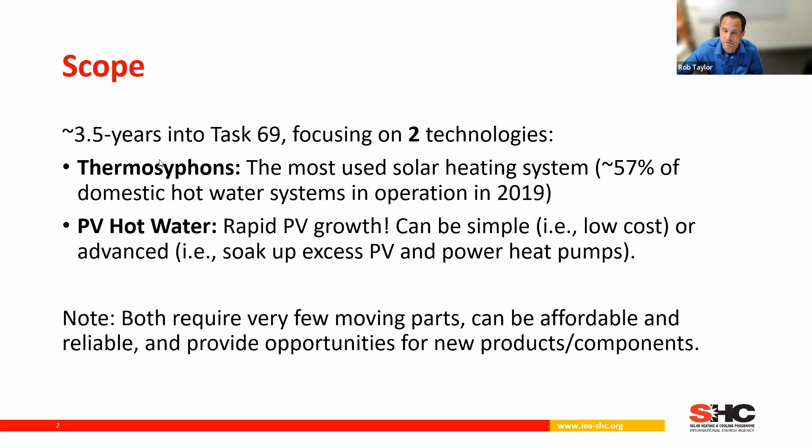So you think of thermosiphons as an old technology that have been around for a long time, but there's ways to make it smarter, ways to make it more durable and reliable. And so there's quite a bit of innovation going on from companies out there.

There was also an IEA report, it's a few years old now, but it said that we need to get to 400 million solar hot water systems worldwide by 2030 if we want to reduce emissions and reach these targets. Many countries around the world have climate or renewable energy targets now. Not every country is achieving those targets, but solar hot water is something you shouldn't forget about as a way to get towards those targets, because it's a big energy demand and there's a lot of interesting things we can do with solar hot water systems to help meet those targets.

But it doesn't look the same everywhere. Different countries, different climates, different income levels, different skill sets in the economy, and different regulations might dictate different technologies are the winners.

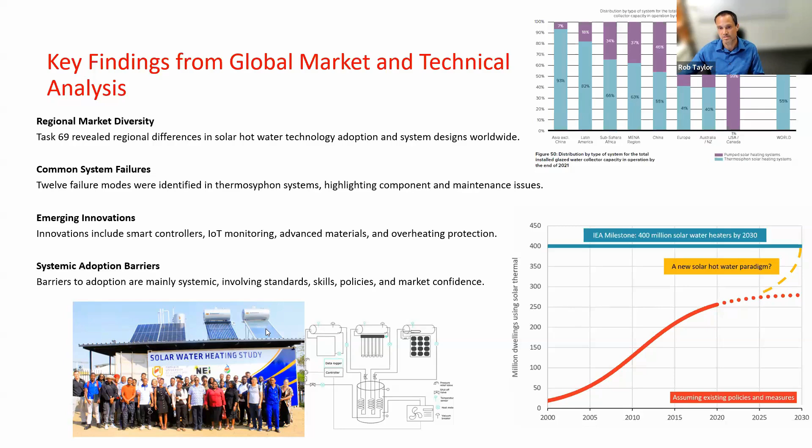There's a comparative study where they have side-by-side PV hot water heating and a couple different thermal technologies there side by side. So we were looking at those comparisons. We did some surveys in our task, and we found what manufacturers are looking at and looking at developing.

A lot of manufacturers are looking at things that maybe seem like they've been well developed, but they still need innovation. So mounting systems - like in the case of Asia, mounting these technologies on the balconies of buildings, even PV hot water heating technologies out on the balcony, and making that safe.

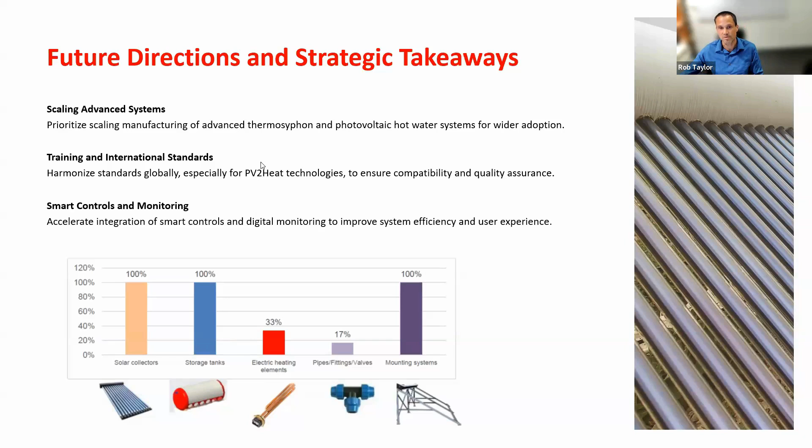Just ways to incorporate solar collectors in the building facade is an interesting one. And of course, like I said, the smart systems and monitoring systems.

There's some materials innovations using plastics to lower costs, trying to find materials like aluminum and new working fluids, which won't suffer from corrosion or maybe could go to higher temperature in places like Africa without having issues. And of course, these little apps and monitoring systems, because previously some of this hot water technology had no idea how much solar energy you were generating into your system.

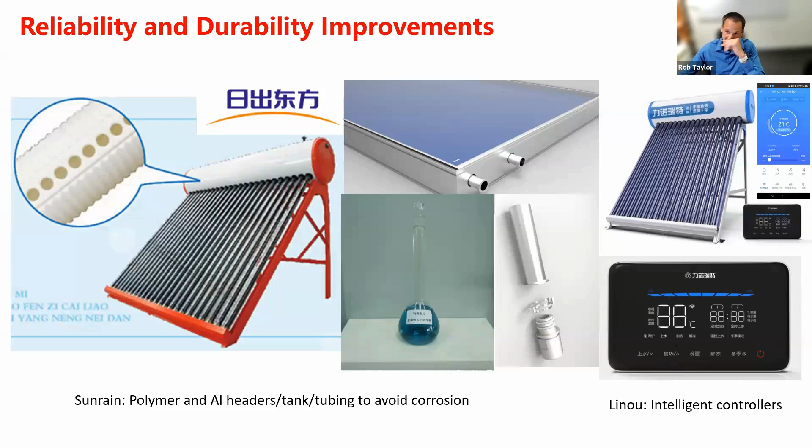And actually, most of the journal papers ended up being around PV hot water heater systems and how to get the most out of those, basically. And so there's a lot of interesting academic stuff in there.

A lot of it came from my colleague here at UNSW, Baran, and some people in Australia for some of those journal papers. And anyway, it's very interesting to me because it's quite cross-cutting across different operating environments and different markets.

So in Australia, for example, one challenge in our market is that a lot of the PV systems are being curtailed. Last year we had something like 10 gigawatt hours of PV electricity got curtailed, which turns out to be the exact same 10 gigawatt hours that we need for hot water heating. So it's just a matter of trying to match up that thing in this operating environment.

I think Australia is kind of living in the future for how much residential PV we have relative to the rest of the world. And also in places like these pictures here in Africa, the solar thermal systems are still going to be dominant for a while because that's a pretty robust technology that can go in those locations, but they do need a few innovations and some ways to make those more reliable.

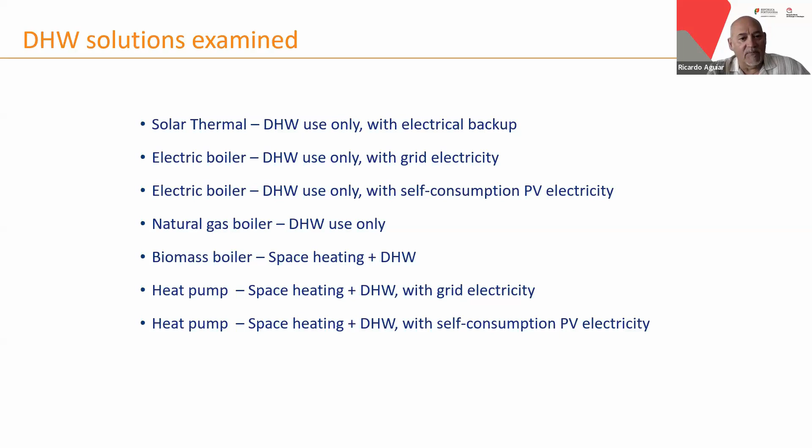These were the solutions examined: solar thermal with electrical backup, not with gas backup. We immediately detected that with a gas backup, the comparison was not good for solar thermal, so we have only used electrical backup. So: electric boiler with a direct link to grid electricity, with also PV; and natural gas boiler; biomass boiler; and heat pumps, two versions, one fed with the grid electricity and another also with self-consumption of PV. There are no solutions with storage because, of course, in this case we already have a tank of hot water which is the storage, so we don't examine things with batteries. We already have the storage.

I will not bother you too much with the methodology and the assumptions of the work. Just to say that we have followed the guidelines for the cost optimal calculations issued by the European Commission, and this includes evaluating the performance of the systems for around 30 years, which is more than the lifetime of most systems, so we have this replacement of parts of the whole system sometimes. Maintenance, etc., is all included.

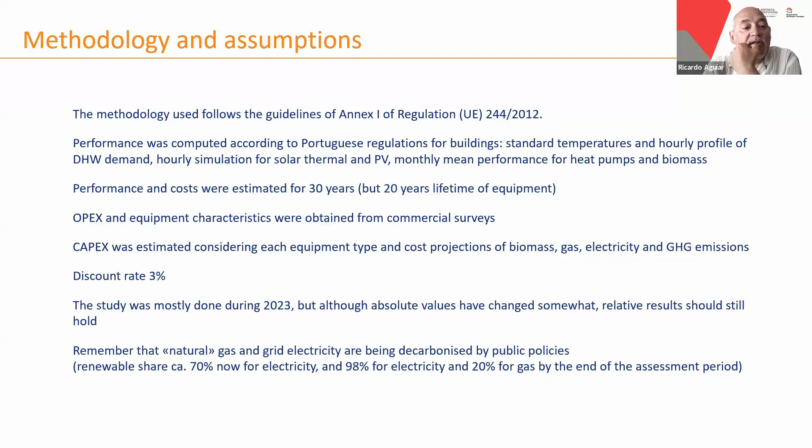Also, in the case of our country, there is a large effort for decarbonizing the grid electricity, so it kind of contains a lot of implicit renewable energy. It's not yet comparable with PV mounted on the building, but we'll get to that in some decades. By 2045 or so, it will converge with almost 100% renewable in the grid. So it must be seen as an indirect way of using PV, but in the grid electricity instead of in the building. And also decarbonization of gas-based solutions, with biomethane and hydrogen, but that only goes to 20% decarbonization. This was also taken into account, so I think we did not leave anything obvious outside of the work.

So this is, let's say, the main results regarding costs. We obtained this result: the lowest costs are for solar PV and biomass. When I say solar PV, you must think of PV directly connected to the electrical boiler - that's what I mean by solar PV. Solar thermal is not too far. And there are much larger costs for heat pumps, but as I will remark at the end, these heat pumps are multi-use, so they do space heating as well as domestic hot water, which is why the costs are so wide. The electric boiler costs are high because the cost of grid electricity is much higher than the cost of solar PV installed on the building.

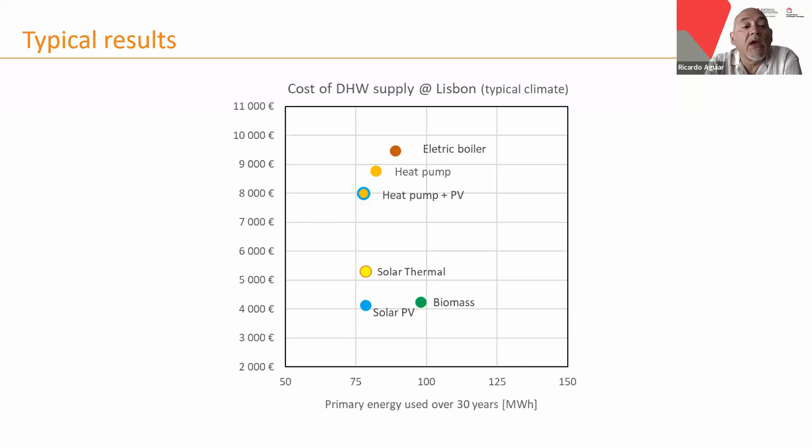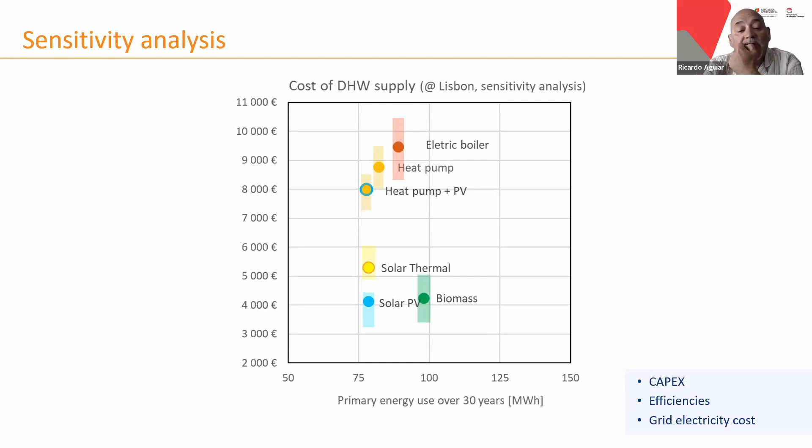So we've done some sensitivity analysis on these results, and they fall within these bands, even when we change the price of the systems, efficiencies, cost of electricity, etc. So the ranking is pretty solid - it doesn't change very much with these assumptions on costs in particular.

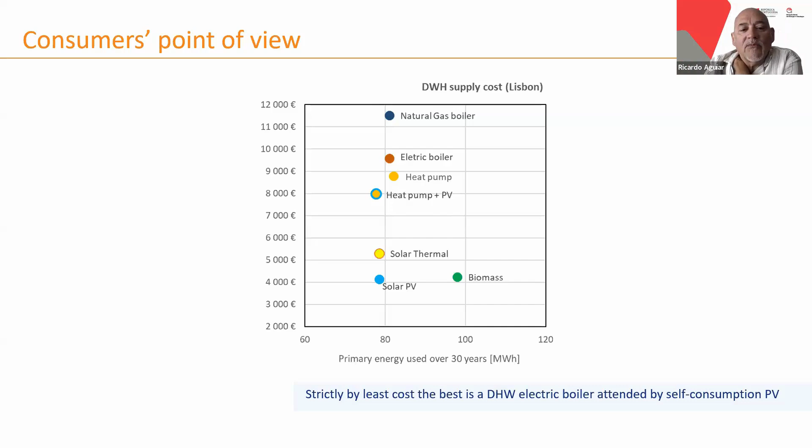On the high end of the scale. So, but again, this is the basic result regarding costs. Now, there are other points of view, and I work in a director general connected to the Ministry of Energy and Environment.

So my point of view is sometimes different from this cost-only point of view. And we have the point of view of the building regulations. For that, it's important the local share of renewables. In that case, you get solar PV at the top at 100%, then biomass and solar thermal.

This 80% solar thermal could go up to 100% if you use solar PV also as a backup to the solar thermal system. But both solars produce energy at the same time. So in principle, these backups are for cloudy days and nights, when neither solar PV nor solar thermal is available. That's why this option of solar thermal is not at 100% like solar PV.

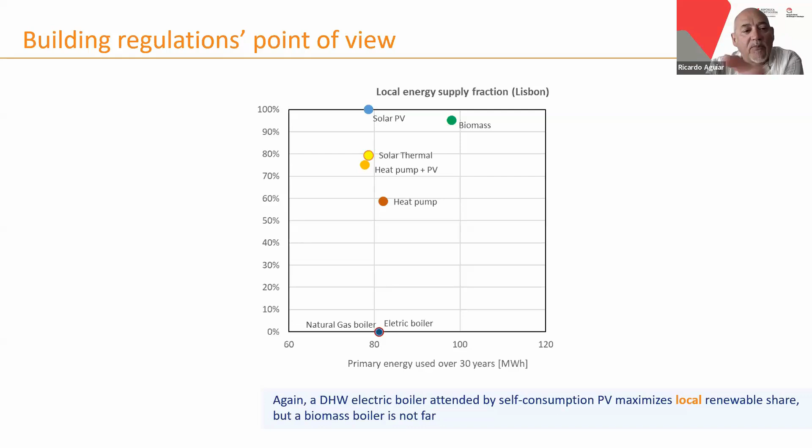So this is the local share of renewable energy, and that's important for classifying the buildings. Then there is the National Energy Policy's point of view, for which you want to maximize the renewable energy used by the building in the general context.

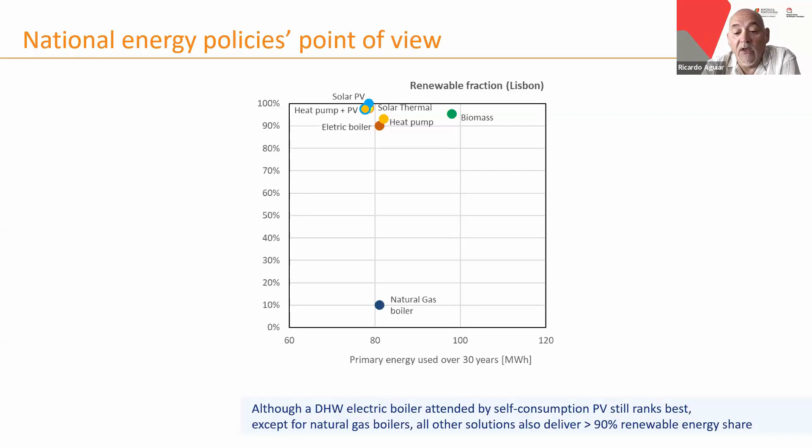From that point of view, all the systems except the natural gas case are above 90%. Even the electric boiler fed by electricity off the grid, in our special case in Portugal, assessed over 30 years, not right now, but over these 30 years, would be close to 90%. So all these solutions would be desirable from the point of view of the broader context of national energy policies. So, other criteria.

Of course, all this can change if we think about other things. If you have just an electric boiler, you don't have other equipment. You can save space indoor and you don't have things outside the building, etc.

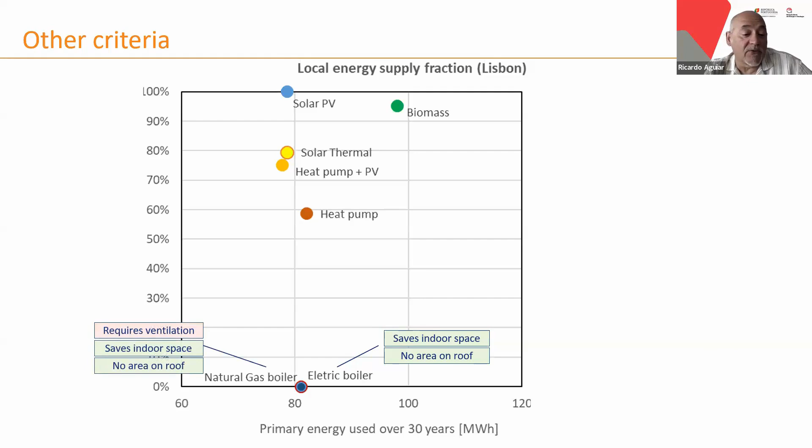If you have a natural gas boiler, you must have ventilation and requirements for air quality, etc. If you have biomass, you have the problems of storage space. You don't have to use area on the rooftop, but you have air quality issues, especially if you use biomass inside a dense urban area.

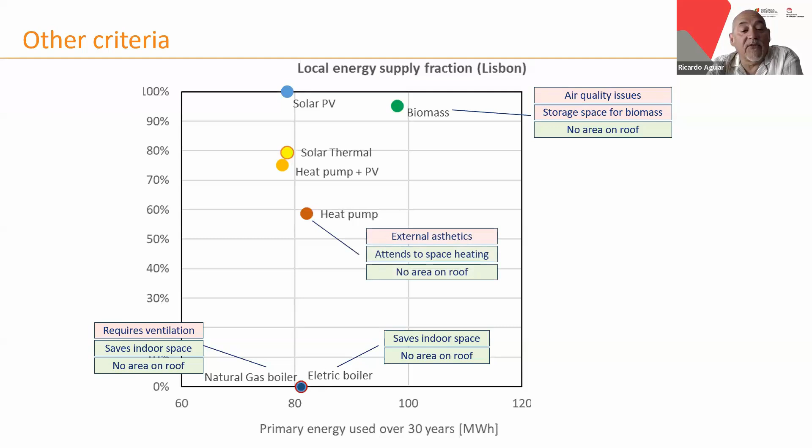It's not desirable. Heat pumps have the advantage of attending to space heating also, but you have an external device. The heat pump itself is outside the building, and that's an aesthetical problem. Besides the price, I'm not talking prices right now.

With the heat pump plus PV you still have the problems of external devices, but it's best in terms of primary energy. And as the heat pump has a COP of 2 or 3, as Rob mentioned, you also do not need to use a large area on the roof, which is the advantage of solar thermal, a big advantage over solar PV, since it requires smaller areas because it has more efficiency.

But as a problem, in contrast with solar PV, the collectors must be tilted, and this is a problem of aesthetics. But it has a large advantage that is not usually mentioned: in the context of reshoring the industry that has gone to China, and also to other countries like India, Indonesia, etc., it's easier because it requires only glass, steel, some insulation, aluminum—things that are more available and easier to handle for the European industry, which is, I'm sorry to say, my concern, than in the case of solar PV, which is dominated by Chinese products.

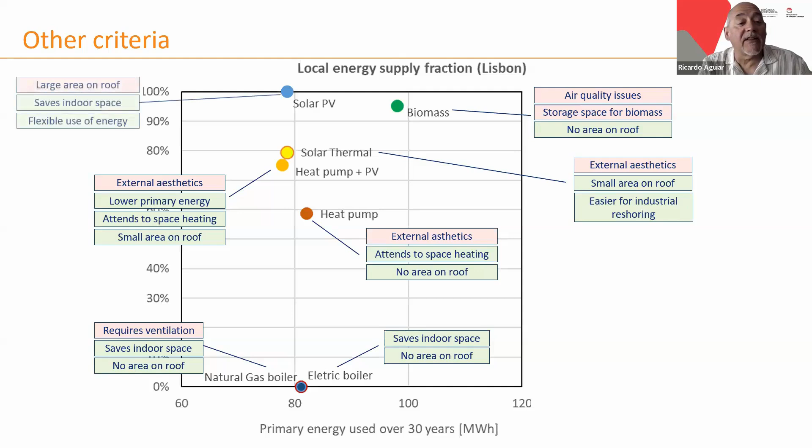And finally, regarding solar PV, we have this problem of larger roof area, but we have also this advantage of flexible use of energy, less plumbing needed, etc. So you have a number of advantages in PV. But all the solutions have some kind of problem, and it will depend on the actual context where we apply the technology to find the best thing.

So, just to finish, if I am in Portugal and have a new building with apartments, say 6 stories or 4 stories of apartments, you don't have much room on top to install PV.

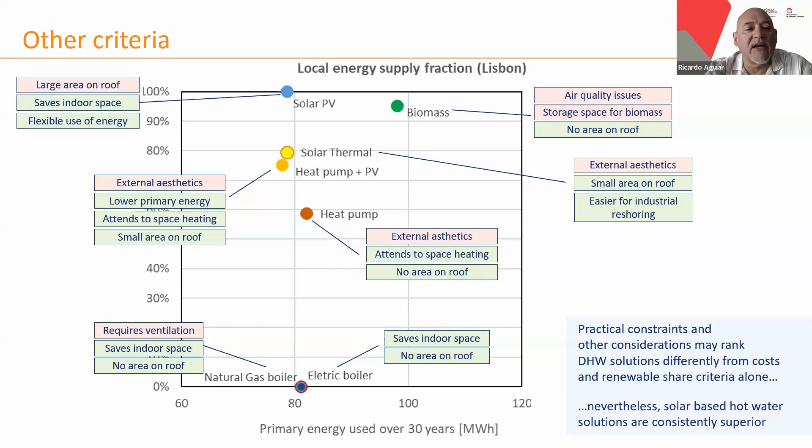If you have 20 fractions or apartments, you don't have much space on the roof to share, so I would probably go for solar thermal. But if I'm in a detached house, isolated from other buildings, I'm not so concerned about roof space, and I would probably use a solar PV-based solution instead. So it depends on the actual context what kind of solar hot water solution is best.

Thank you very much, Ricardo. I'd direct your attention to one of the questions, which was from me, but there are a couple of questions in the chat too, following up on the details. If I may, as time is running, it's already 11:15, we should go quite fast on the questions and then move to the Miro exercise if we want time. But there are rapid questions to cover.

Ricardo, did you want to comment on whether the primary energy included the embedded energy or just operational energy, and whether service and maintenance were integrated into their approach?

Yes, service and maintenance were included, and that's more favorable for PV, of course. Regarding the embedded energy, well, I came from the public policy side, and the emissions embedded in the actual construction of the systems are in the manufacturing industry, so they're assigned elsewhere. We don't use a life cycle analysis that includes the embedded energy, because it's already accounted for in another sector of the economy. I could use that, but it would not change the results much.

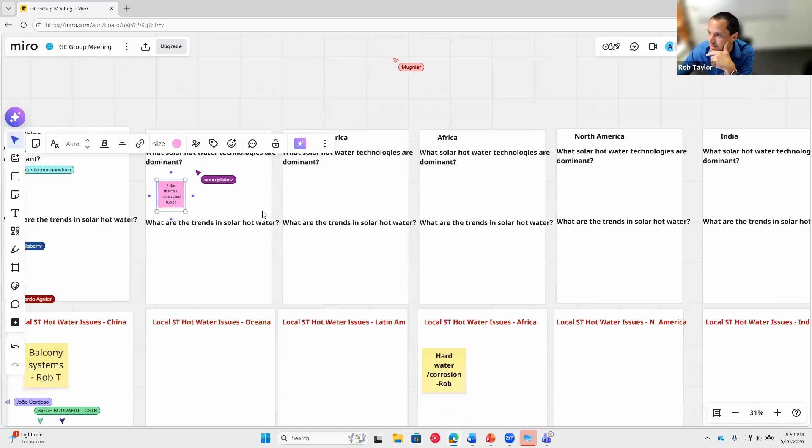If we could just go along that top row now and add in some of our thoughts from your region or from the global one, if you want to make some comment on that, or if you know something about the other regions, you can write that in. It'd be good if people put in at least their name or initials so we can keep track of who did what.

So what I'll do next is I'll try to take all these sticky notes from the Miro board and some of the comments from the chat, hopefully, and put it down at the bottom row there that says key takeaways, and I'll try to pull that all together over the next few days. The Miro board can stay open, so you can keep adding more things in there, and then we can send it around.

I guess this participant list is the start of a mailing group for our collaboration group, and if anyone wants to take themselves off, let me know. Otherwise, we'll try to email everybody the key takeaways and some of the things from the meeting.

We had sort of thought we could have quarterly meetings or something like that for this group. Hopefully this initial meeting will help us figure out some areas that we want to really focus on, and maybe the next meeting we could look at a couple of these things in detail.

So for example, this policy thing, if that's of interest, or maybe Samson and people from Africa that are interested in the industrial applications, maybe we can get some fact finding between now and then, share it with the group to inform everyone, and have some knowledge exchange at the next meeting.